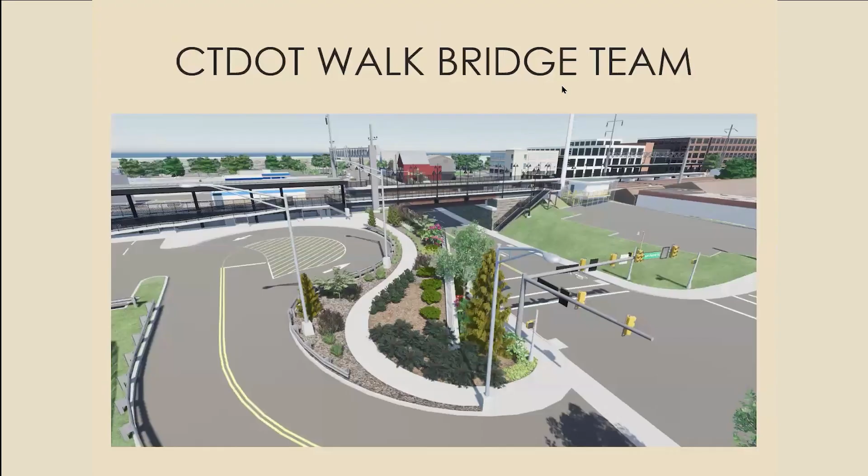What I'd like to do is go ahead and introduce our guests for the evening. Many of you have been writing into ENNA, the city, and our elected officials regarding what we call the Walk Bridge project. As you know, there are many components to that, 5 of which directly impact East Norwalk proper. Given the feedback and questions we're getting, we thought it was a good time to bring in the team. They're always agreeable to meeting with us, and they'd like to hold everything to an hour, which we'll try to do. They've been working all day, and we can always have a follow-up meeting. They're very gracious about coming back, and if we haven't answered all your questions by the end, we can submit those to them for a written reply or a return visit. Without further ado, and Stephanie, remind me if you can, because I'll forget: I want to come back to this slide if it's not part of your presentation, to orient folks on some portion of the work along East Avenue.

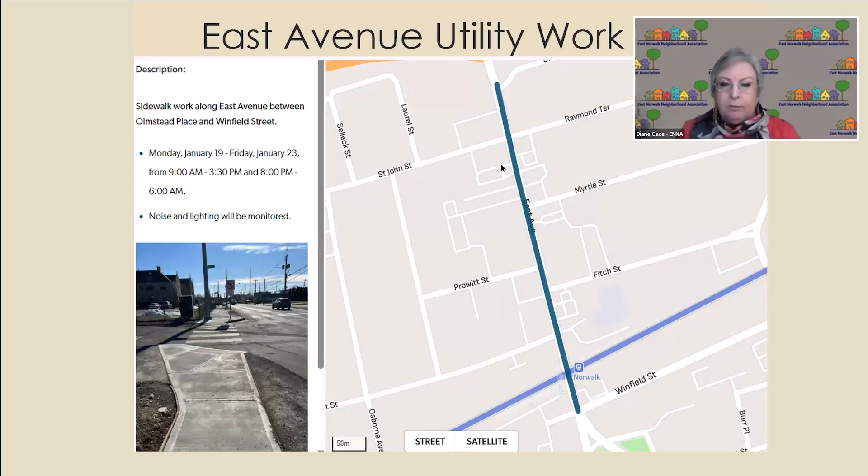Good evening, welcome everyone. Happy New Year. Happy New Year, thank you everybody.

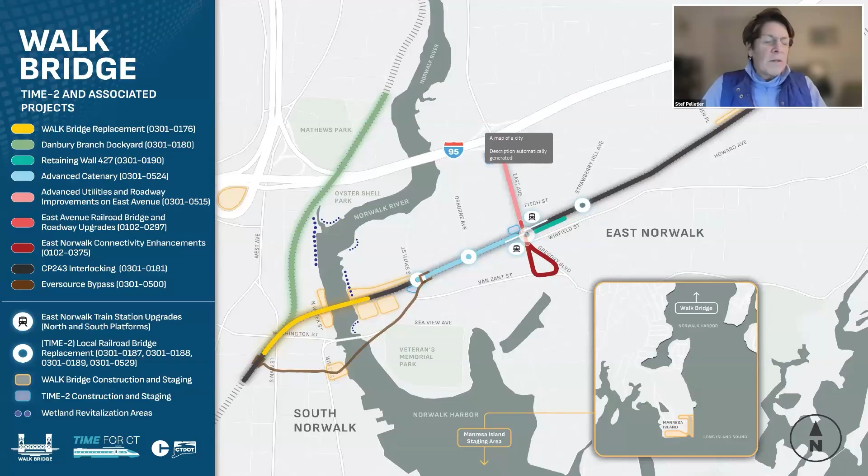We're delighted to be here. We have multiple concurrent projects going on in East Norwalk, as well as the Walk Bridge in South Norwalk. For tonight's meeting, we're here to provide an update on the projects in East Norwalk. We'll kick it off with RJ, who's going to take us through the map as a big overview of the projects going on in East Norwalk, and then we'll get into the presentation.

Hi everybody, as Stephanie said, my name is RJ Lesso. I am the project engineer for the projects associated with the Walk Bridge program in East Norwalk. Happy New Year, it's nice to see familiar faces and names on this meeting again. This is our project map. If you've been to any of our other project updates, you've seen this map. We have a lot of work going on in Norwalk, and in East Norwalk especially.

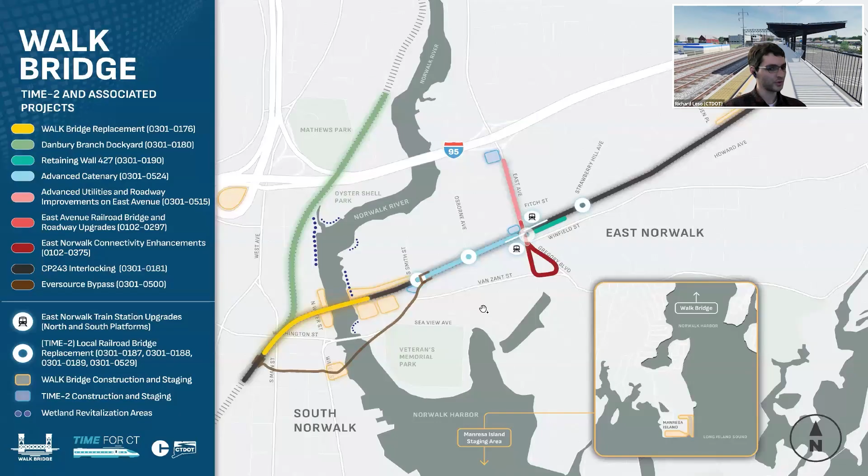Let's jump into the projects and take a look at the work in East Norwalk. We'll go one by one, starting at the west side: Fort Point Street, railroad bridge, and roadway realignment. Right now at Fort Point Street, we're working on the bridge abutments, the substructure of the bridge. As you may remember, the bridge is being built offline, adjacent to the existing bridge, so we don't anticipate any major impacts to trains, vehicles, or pedestrians. This portion of the project is currently anticipated to complete in summer 2029.

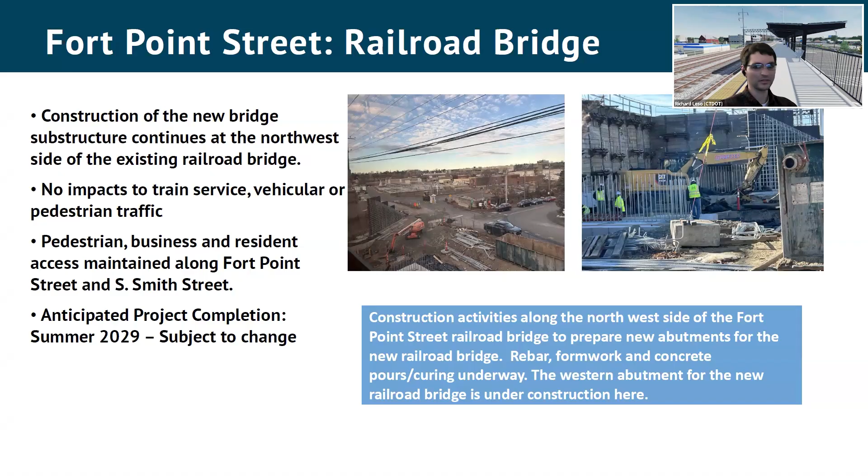If we could go to the next slide, we'll talk about a project that's had a bit more impact on traffic lately—retaining wall 310, adjacent to the existing Fort Point Street Bridge on the north side. You may have noticed we're forming and pouring some of the architectural facing on the existing retaining wall. Currently we're working on a permeation grouting operation in the street, where grout is pumped into the soil to stabilize it under the west end of that retaining wall. As a result of that work, there have been some impacts to traffic. Northbound passenger vehicles are currently detoured westbound onto Van Zant Street, and southbound vehicles are detoured westbound onto Reynolds Street to South Smith Street. The retaining wall work is expected to wrap up in spring to summer of 2026.

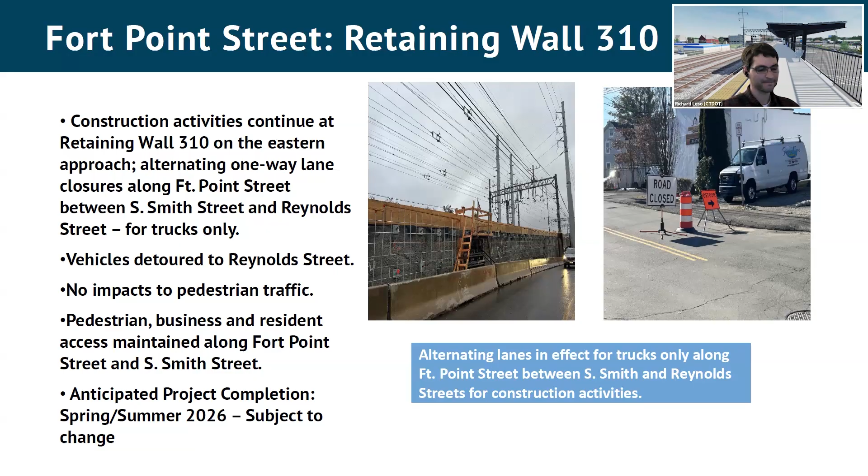All right, and pictures—we have some renderings. Again, if you've been on these update meetings before, you've seen this. You see the existing roadway realignment and our new roadway realignment. The new bridge will be directly across from the existing South Smith Street. This is going to resemble more of a typical intersection, and it's going to clear up a lot of the sightline issues that exist at that intersection now, and hopefully facilitate smoother traffic flow. You'll see we'll be adding bike lanes, new sidewalks, etc.

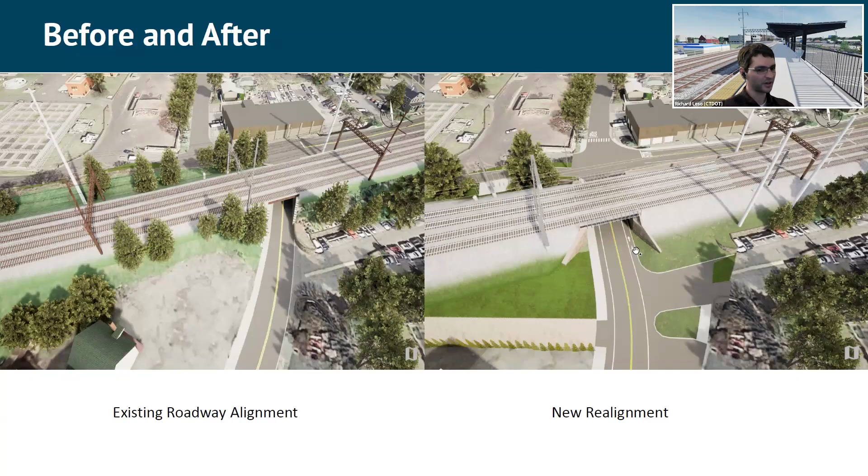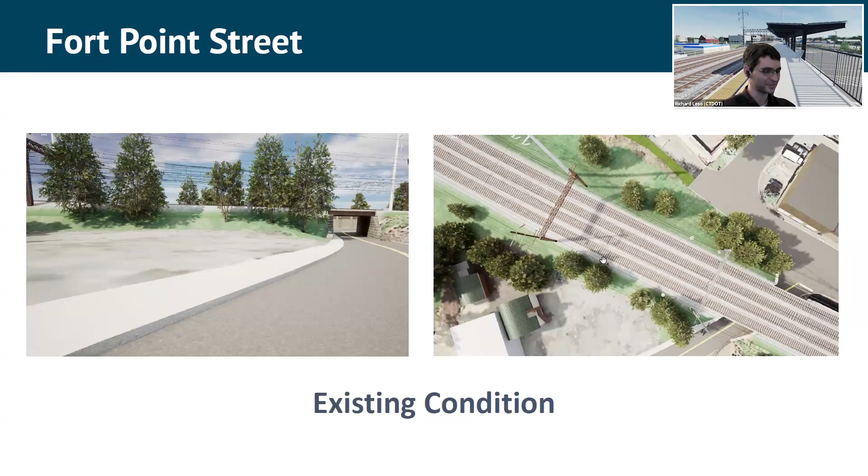I believe we have a couple more renderings of the existing condition. We don't have to stay here too long, I'm sure everyone's familiar with this existing condition. And then our final condition—again, you'll see we'll have wider sidewalks that are ADA compliant, bike lanes, and of course the realignment like I said before.

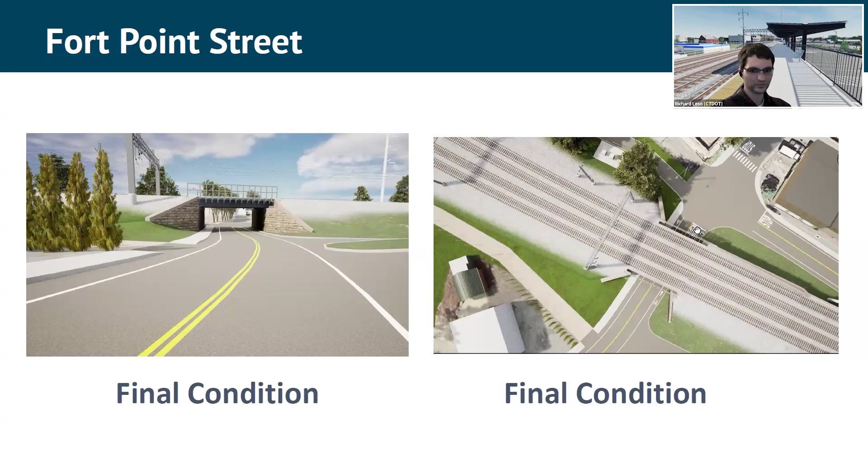The south side work is expected to begin in early 2027, basically following suit with what we did on the north side. We expect Osborne to be closed for approximately 6 months, similar to the north side closure, while we do that work. We expect the project to complete around summer 2027, and we'll wrap up by resurfacing the street and rebuilding the sidewalks.

Moving east, we have our East Avenue Railroad Bridge. If you drive through the area often, you'll notice there's a lot of work going on at East Ave. We're currently working to complete the north side of the bridge, and we expect the steel to be erected sometime in March of this year. Just like the Osborne Avenue Bridge, we'll do about the same thing on the south half once the north side is complete. We expect the south half to be wrapped up around winter 2027.

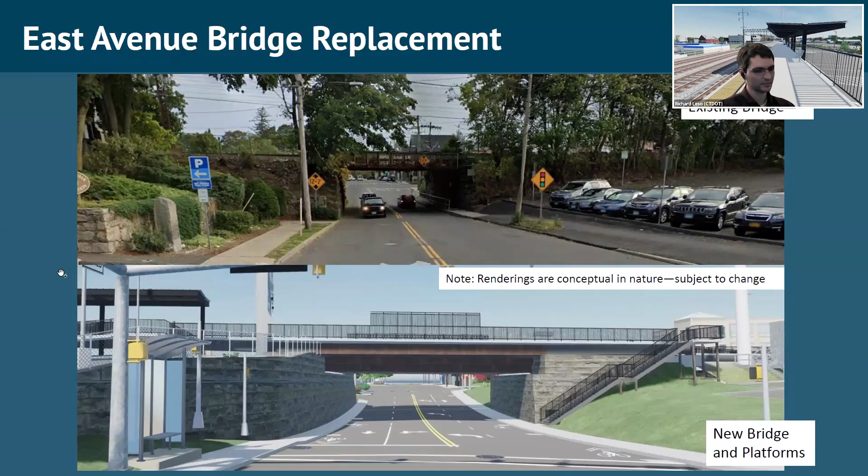We have some photos of the existing bridge and renderings of what the new condition will look like. You can see our bridge and our platform, which will also go over the roadway.

Hey Rich, the canopy steel just came in, huh?

It's Diane. Just before you leave those slides, it's hard to discern the depth perception from the previous slide. Is what the community is seeing here now including what we refer to as the lowering of the roadway, and where does that actually start? Because in the slide before, it seemed like it doesn't start at all, and then there's kind of a dip. Is what we're seeing on the roadway now the lowered roadway, or is that still waiting to be done after all the digging that's already been done?

Right now we're in an interim stage, so the roadway has been slightly lowered, but we haven't done our final lowering of the roadway yet. It will be in this area, that dip as you get into East Ave, as you go over this crosswalk, is kind of when the dip happens for our lowered roadway.

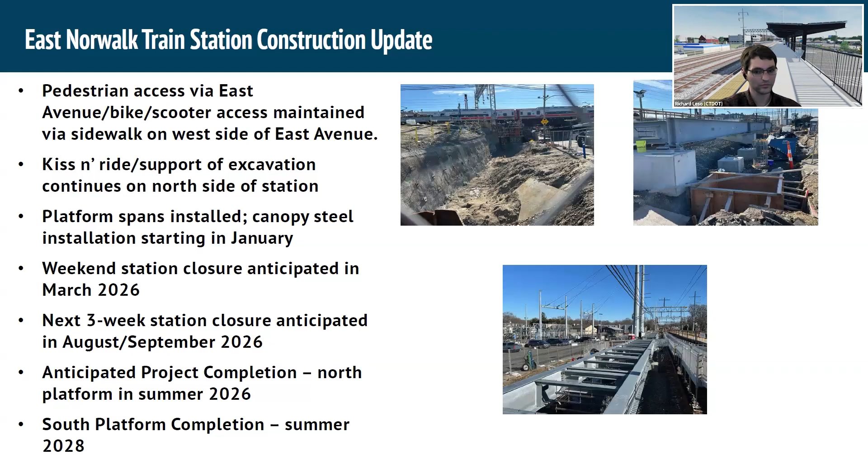Here's some of the renderings of the existing station, and this is what we're working toward. This is the kiss and ride area that I was talking about earlier. This alone will prevent you from having to go into reverse when dropping off a passenger. Forget everything else we're doing, this alone is a major safety improvement at the station. There's a lot of foot traffic at that station, and preventing vehicles from having to go into reverse to drop off a passenger is a major safety improvement, especially during peak commute times.

Can I ask a quick question? Sure, sure. The kiss and ride, that's on the New Haven bound side, yeah? New York bound. Oh, it is on the New York bound side. Oh, that's terrific. Great, thanks.

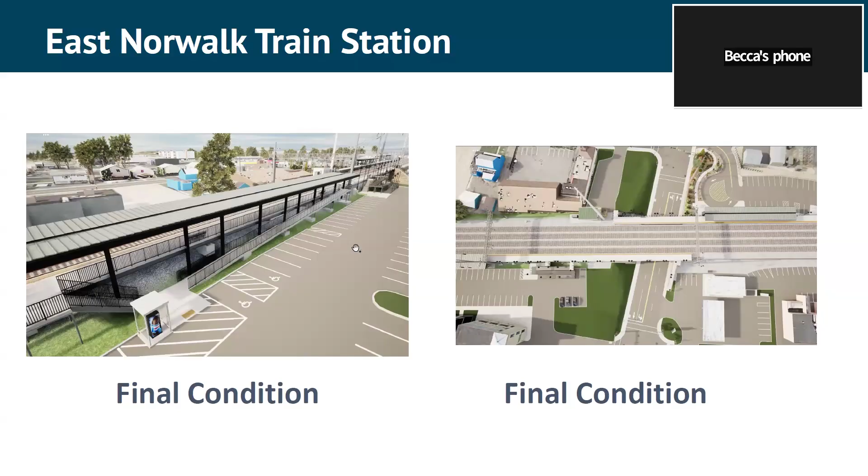And this is just another view of the final condition at the train station.

Moving on, East Avenue roadway improvements. East Avenue roadway improvements is sort of a catch-all for all the work we're doing on East Avenue and some of the adjacent streets there. That work is happening under a variety of DOT-administered projects. As you probably already know, the roadway will be widened, and you'll see new crosswalks and sidewalks. And then, of course, the Gregory Boulevard streetscape and drainage project, which we move into right after this slide. All this work is expected to last 3.5 years, completing sometime in the fall of 2028.

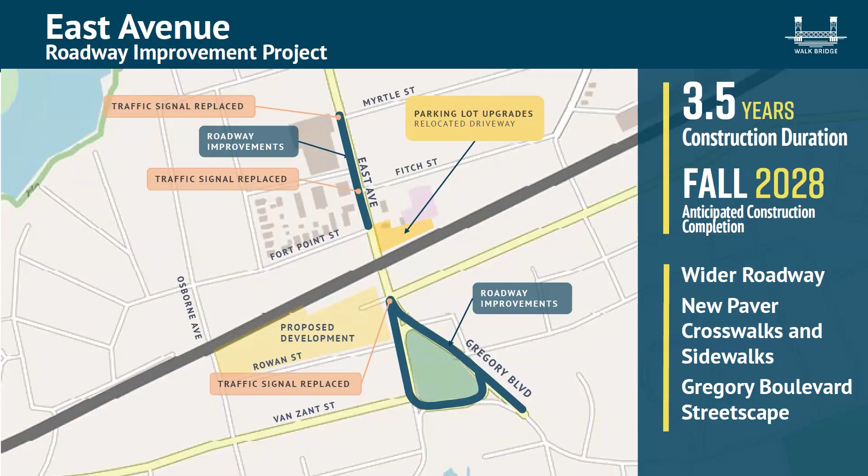Now moving into East Norwalk connectivity enhancements. This is a streetscape project, officially known as the East Norwalk Connectivity Enhancements Project. Like a lot of the work on East Avenue, the project is designed by the city, and the contract is administered and paid for by the Department of Transportation under District 3 construction, which is the unit that I work for in DOT. And of course, we're administering all the Walk Bridge program projects.

This project is going to be starting up soon. That contract was awarded to the Grasso companies approximately a month ago. So the next step is that contractor is going to be issued a notice to proceed in early February, which is how we officially commence the construction contract and authorize it to begin work. Under this project, we'll be doing a lot of deep drainage work down Gregory Boulevard, full depth roadway reconstruction, sidewalk reconstruction, and we'll also be adding a dedicated bike lane on Route 136.

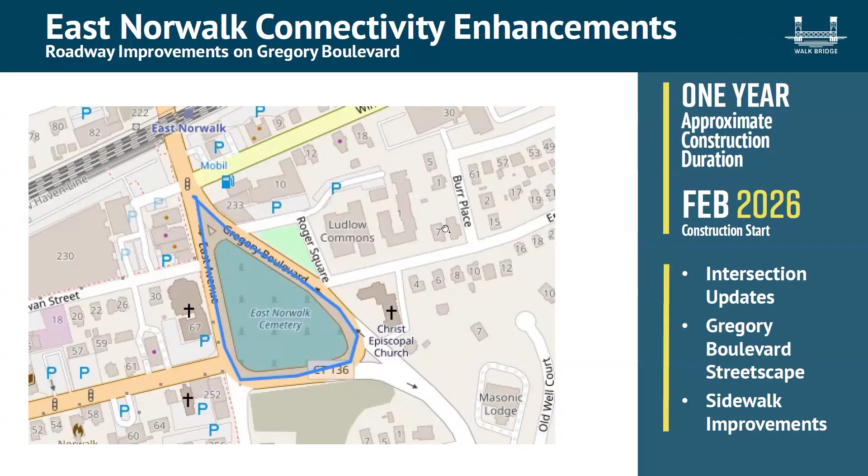And then we have some information about the drainage project on Gregory Boulevard, particularly the intersection of Gregory Boulevard and Cemetery Street. First, I want to say that I know this is a sore spot for the community. Just to provide some background for those who may not know, and I'm certainly not an expert in this matter, but I am willing to communicate the facts as I know them. So the city and DOT worked to finalize the plans for this project, and under those plans, the island at Gregory Boulevard and Cemetery Street required reconstruction. Under that island is an existing box culvert where the East Avenue drainage flows underground, down Gregory Boulevard, and eventually into the culvert under the island into an existing opening in a box culvert.

DOT received a request from the city to review a revised design which proposed retaining the existing oak tree in that island. Unfortunately, due to a variety of technical factors, most notably the age and unknown condition of the existing box culvert, for which there are conflicting and in some cases non-existent records, there were a lot of unknowns about that culvert. DOT ultimately decided that the risks to the projects—plural, meaning this project and also other projects which would be consequently affected—

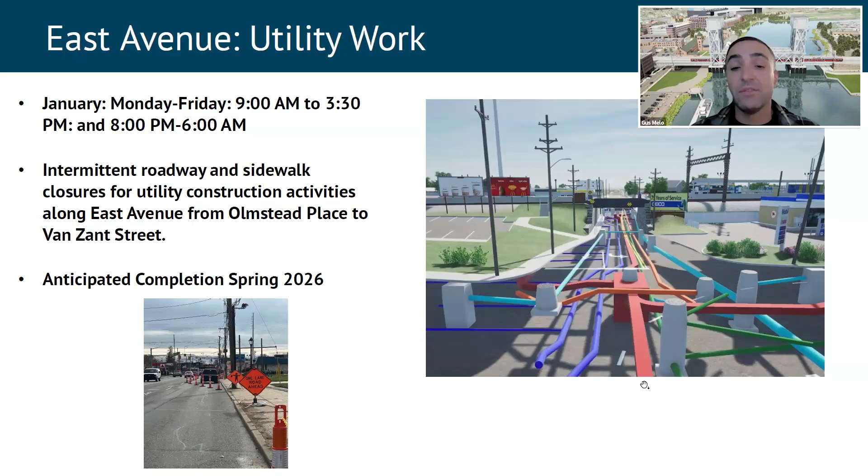Also, we need to have that new drainage line in place, so that when we lower the road we could take in the additional flows and prevent the flooding you guys currently frequently see along East Ave. We need that drainage installed before we do that final lowering - we don't want to create another swimming pool for you guys when we get heavy storms. So that's really why these things are sequenced in a certain way, and it has to be done in that fashion.

Okay, I don't think I'm still clear on the steps taken relative to lowering and digging up the road again and accomplishing all of that, especially with the drainage, but we can move on from that, and maybe some other folks have questions on it.

I think the other big question is the timing on all of this - is this a priority in terms of trying to expedite this versus what the original project plans were? Because it does seem to be dragging on forever, and we see timelines now of 2027 and 2028. What can be done to expedite this?

Well, we try our best, right? We've added additional crews, we're looking to add additional shifts out there, and try to maintain the schedule as best as we can.

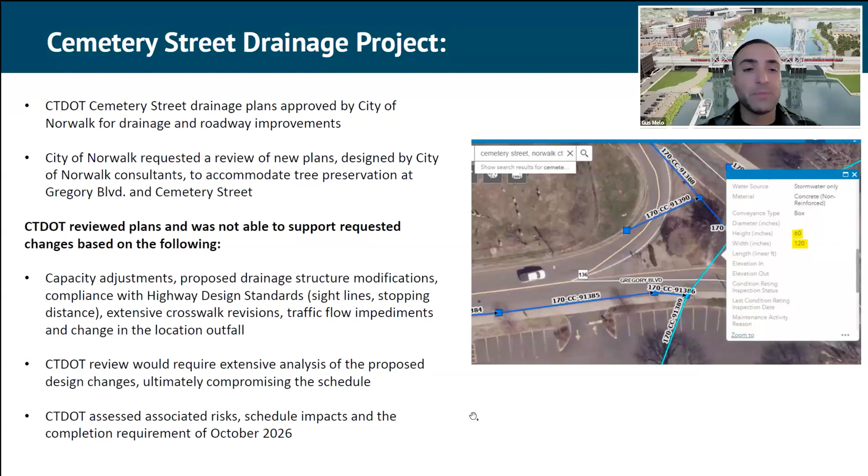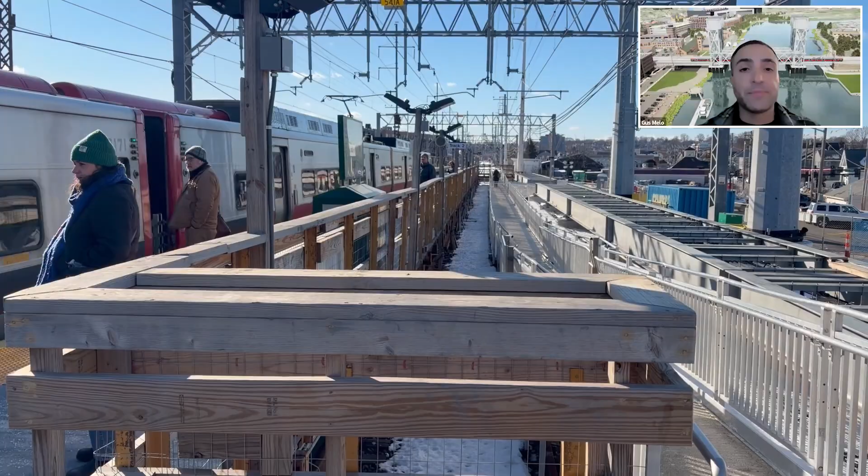Since we're looking at close to another year before the actual train station is completed, is there any plans to put up a temporary shelter for people in the rain or snow? It's been pretty brutal out there. No, there currently are no plans to put in that temporary shelter in that area. Unfortunately we're not able to do that because the temporary platform was constructed over the existing track one there, and there's overhead catenary wire that are electrified, which would prevent construction of that shelter.

Next would be, is there an improved traffic pattern for the existing New Haven side parking lot? No, we're not making modifications to that parking lot.

Judy in the chat says, when there are major closures that affect the flow of traffic to 95, can there be coordination with Westport so that Winfield and Saugatuck is not closed at 17 from East Norwalk at the same time? Yes, we'll take a look into that.

Is Strawberry Hill Bridge built to handle the periodic and frequent truck strikes? At least every 2 months a truck nails that bridge. So I can comment on the Strawberry Hill. Yes, the Strawberry Hill Bridge is designed to be impacted by an overhead vehicle. We would prefer they didn't drive into it, but, yeah, of course.

Do you have any graphics for the Eversource project? No. No. Okay, I'm not even aware of what project they're doing.

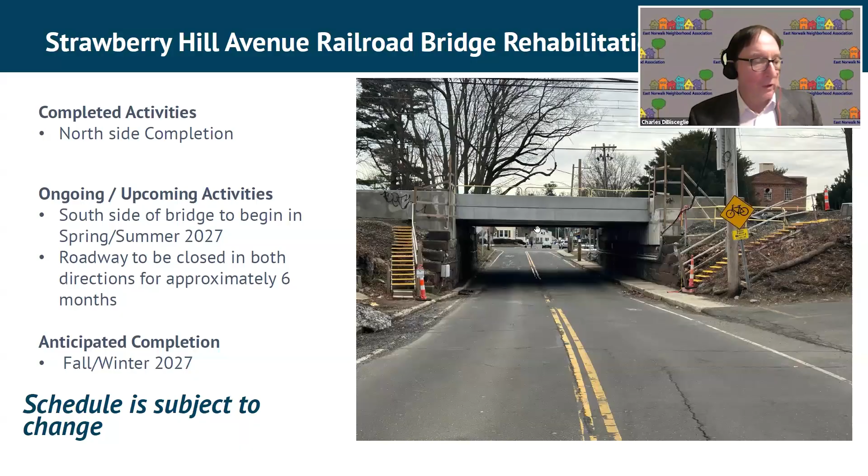I have a question about the Osborne Bridge. When you say you are going to restore the sidewalk, is that both sides? Because one side, the sidewalk just kind of ends at that bridge, and pedestrians have to walk into the street to actually get to Fort Point.

It'll be the existing sidewalks that are restored. We'll put 5-foot sidewalks back in the existing footprint. So that will remain a dead end basically for the sidewalk on that one side. I believe so, yes.

If that's the case, is it possible to petition to add a crosswalk and maybe a warning light, like a light that pedestrians can illuminate to alert cars because the pedestrians have to cross there? Even just some watch for ped signage would be really great. Yeah, we could look into that.

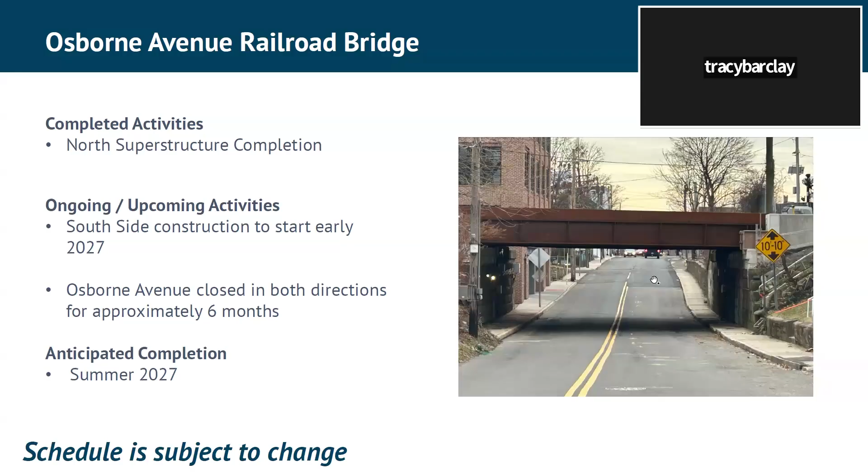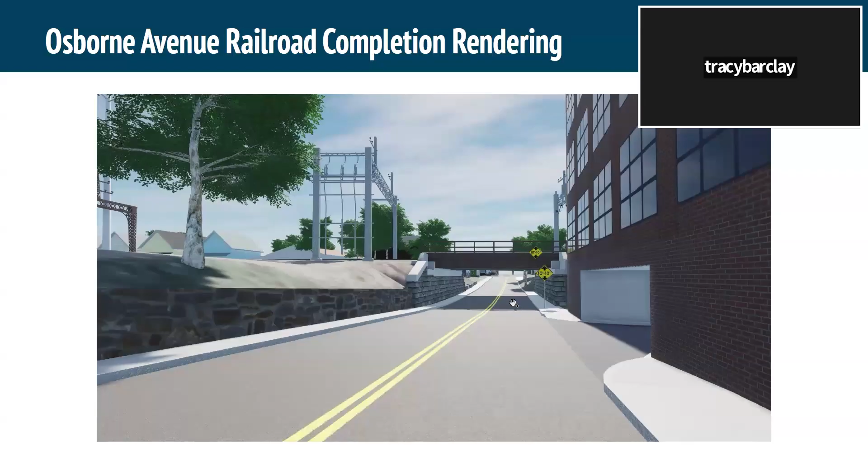On the rendering, it looks like there are no sidewalks, only a bike path. Oh, I'm wrong. Yeah, I agree, there should be a crosswalk or something, there are so many pedestrians there. Yeah, it's the heart of the TOD.

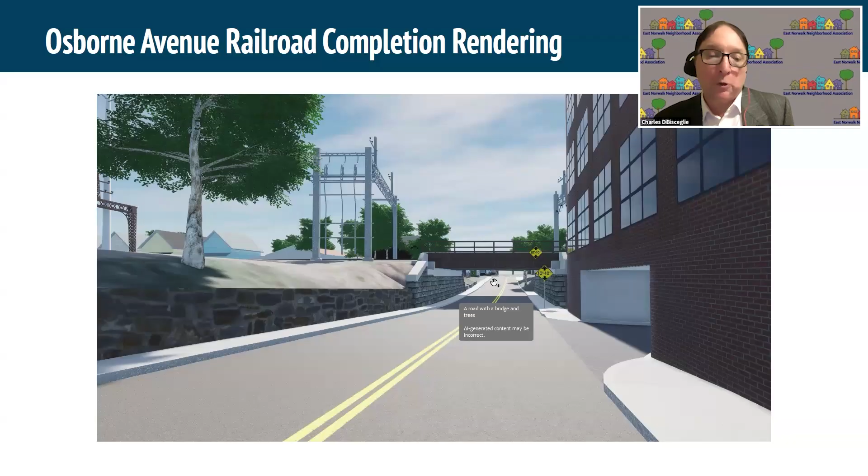Okay, so when will the double pole at East Avenue and Winfield go away? It forces pedestrians into the street if they're coming from Gregory. Double pole, what are you referring to?

If you're walking past Giant Laundry towards the East Norwalk train station, there's a double pole that blocks the sidewalk. It's the one corner not visible in that last slide you just showed, or in any of your renderings, but I'm talking about the corner nearest to Giant Laundry, where there's a double pole at the Chester's Chicken gas station. If a pedestrian is coming from the Giant Laundry direction, you have to walk into the street to get around the double pole if you're not thin as a rail and don't have a suitcase or a stroller or anything like that with you.

And even though the crosswalk is a lot better with the reminders, people still turn on red at whatever speed they like. That's the Valero corner. Yes, thank you. I just think of it as the Chester's Chicken corner. The south side of Winfield. Yes, southeast corner of the intersection.

Yeah, that's when we're gonna be upgrading that intersection there. Jeff, do you remember the date of this? It's '28 when we're gonna be putting in those signals? Do you know that off the top of your head? Off the top of my head, that sounds correct. We can get back with a better date, but that seems like in the ballpark. I would have to get back to you on the schedule, but it'd be late '27, early '28 when we'd be putting in the new signals, which would eliminate all that. But it is planned as one of the utility improvements that the double pole will go away. Yes, it is. Yay! Thank you.

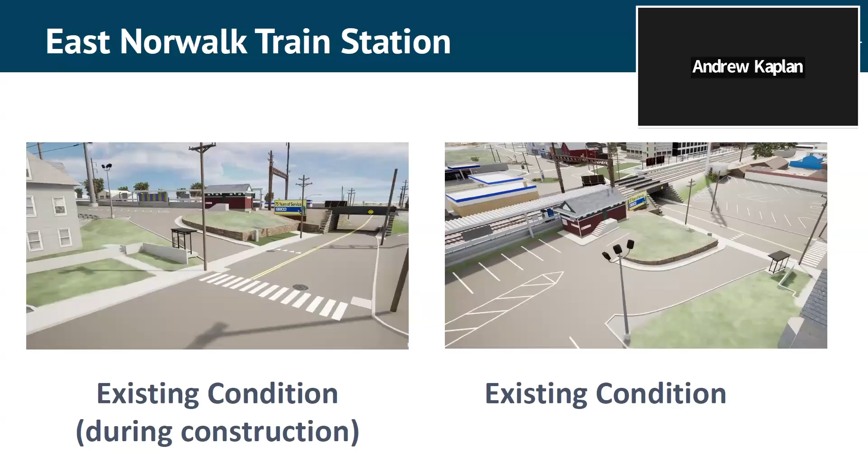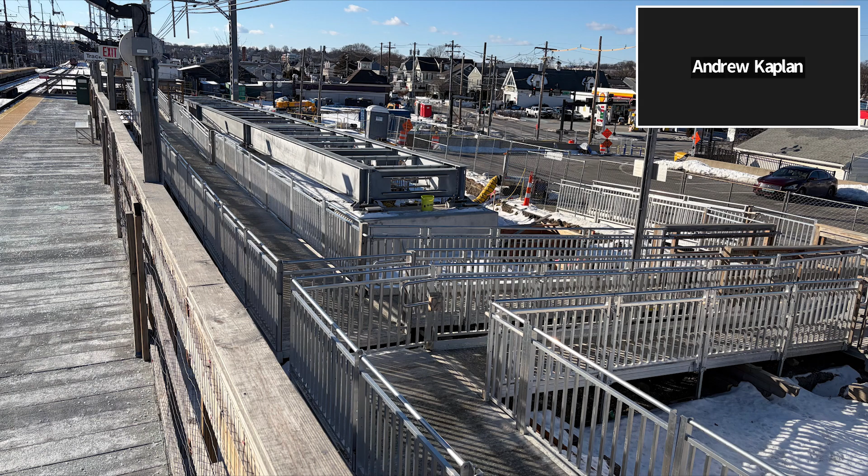I just want to revisit the shelter that can't be erected on the New York City side platform. Can you explain that a little further? I don't see why you wouldn't be able to cantilever something out over there, or possibly get 4 points and post down something. I'm out there every morning, rain or shine. So why can't you put something up?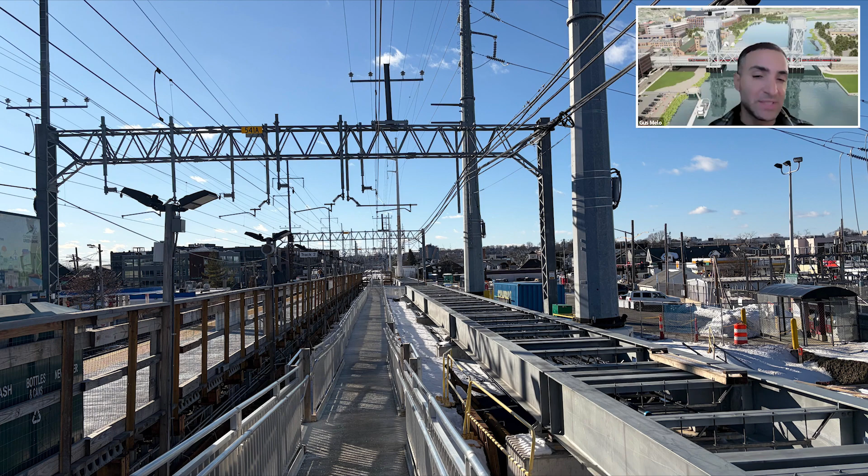Right now we're currently over that temporary platform on track 1, which has overhead catenary wires. We can't put a structure too close to it. So that's really the issue we have out there — there's no section along that whole run where the catenary wires aren't directly overhead, and you can't get too close to them, or it becomes an issue. That's why we can't have anything in that area.

So you can't get below them? We could get below them, but you can't get too close to them with anything.

It's ironic that this whole project started originally as Metro North with the catenary lines, and then turned into something else, which you're seeing today, and then some. But I'm not understanding — the catenary line work that still has to be done on the East Avenue train station, is that going to remedy the issue for the canopy?

No, we're putting canopy on the new platform, which is adjacent to the tracks, adjacent to the existing catenary. The platform is literally sitting on top of track 1, the interior track, but you have overhead catenaries above it.

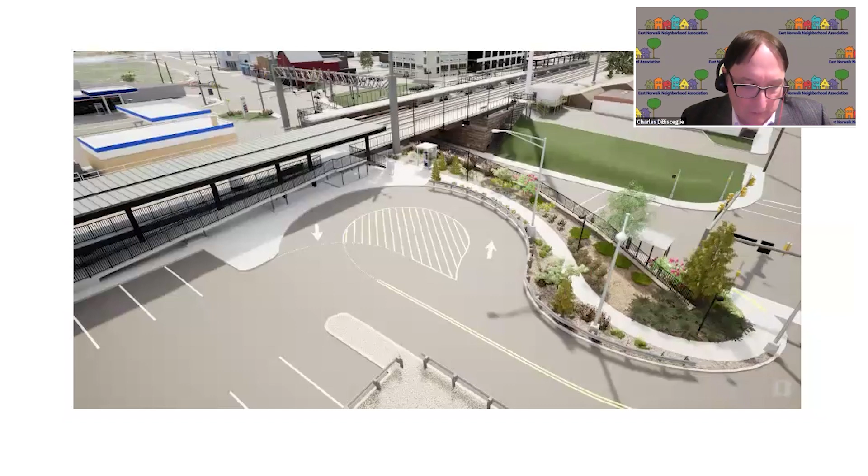I actually have one quick question about the final rendition of the station. I know that the ADA compliant ramps are there and they're necessary, but are there any plans for a fast track staircase to get to the platform without walking half a mile up those things? If you're late for a train, it really becomes a problem. In the final condition, there will be. Okay, very good, thank you.

Did we get an answer to the first question about the lighting under the bridge? I think that may have been answered, but then I didn't catch it. Under the railroad bridge, yeah, there will be lighting under the bridge. I'm not sure it's shown in the renderings, but there will definitely be lighting under the proposed bridge on East Ave, after the lowering of the road.

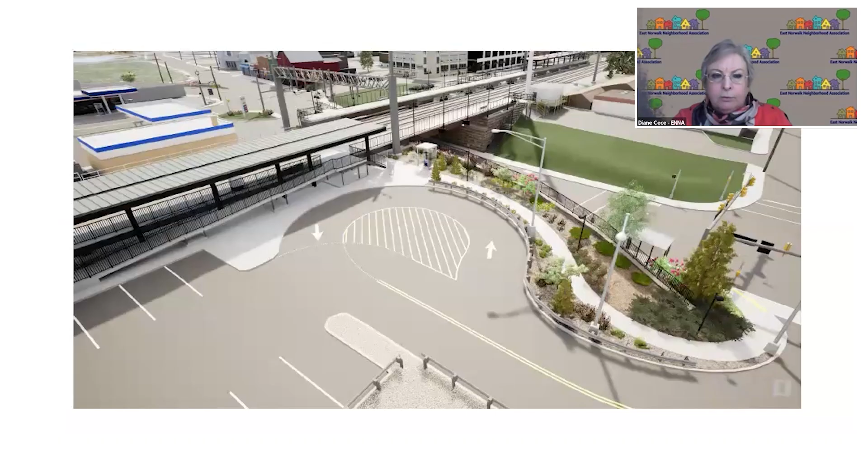The other question I have is I was in communication with your team, just from ENNA, regarding the southern portion, the New Haven bound side, where you were talking about needing to put in another trench and a structure there. I didn't really understand what that is, so maybe you can explain that to us. And also, can you confirm for sure that the freestanding building that Spinnaker committed to the community when Brim and Crown went in, that was supposed to be an amenities building that maybe had a small newspaper stand or coffee shop on the bottom for folks to stand in while waiting for the train — can you talk about the structure on the south side and confirm whether or not there's going to be an amenities building there?

The drainage structure on the south side you're speaking to? As part of the project, we're putting in a new drainage line, which is tying into the culvert down by Cemetery Street, so those drainage improvements are part of the improvements for East Ave to prevent any future flooding there at the road. I'm having a little trouble understanding you. I'm sorry—so what I'm talking about is within the parking lot, I believe, on the south side, on the New Haven side.

Yeah, there's a utility building going in along the railroad, Diane. It's a utility building, not for commuters, and we're doing utility work there. That's why we had a temporary parking restriction of approximately 20 spaces, to dig the trench and put in the utility building. So that's purely for utilities.

It's not for commuters. As far as the Spinnaker promised building, I don't have any information on that. I don't know if members of the team do or not. We do not have any information on that.

And the utility building is just like a structure that you have access to maintain. It's a building where we can maintain utilities for the station - power panels, generators, those appurtenances.

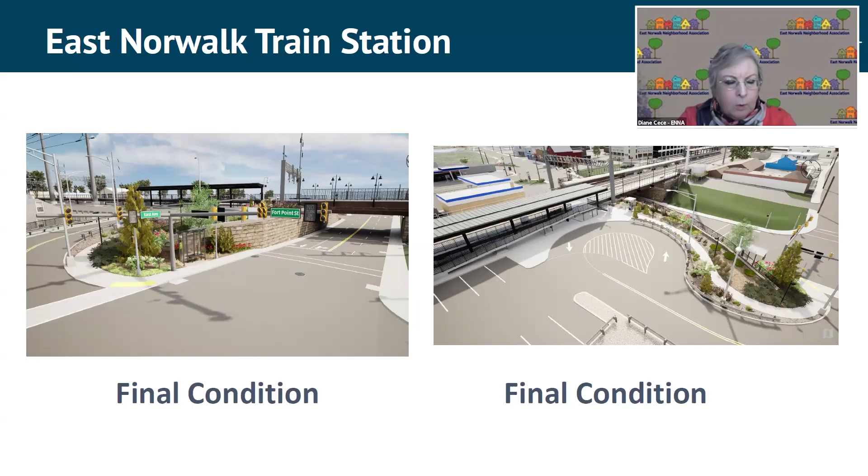And then while we're waiting for a couple of other questions, do you have any definitive answer yet on the future of 182 East Avenue, the temporary commuter and staging lot next to Rite Aid, or the former Rite Aid? No, we do not.

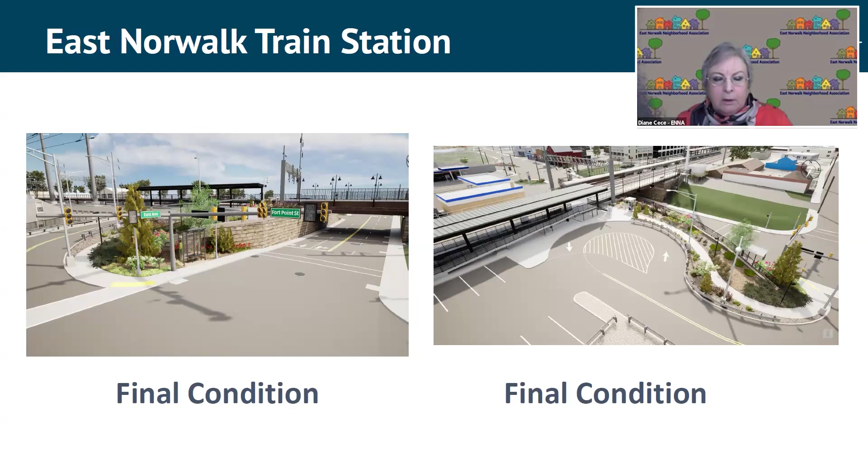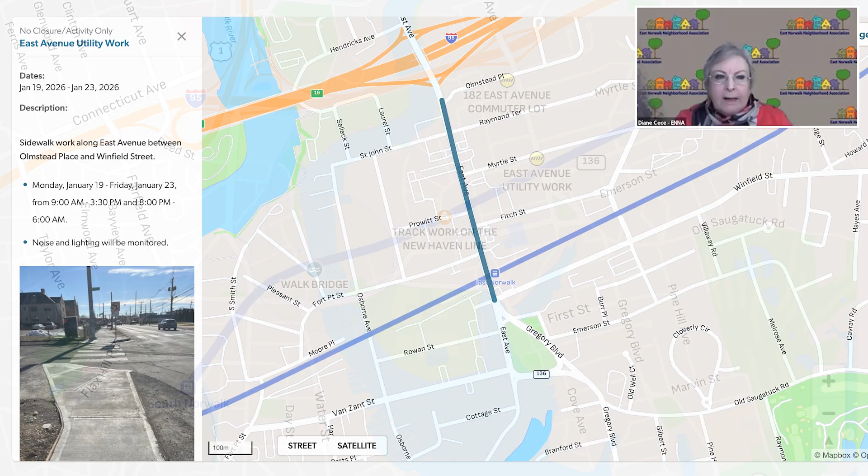Okay, and then Stephanie, the picture that I mentioned before, the one I wanted to show you - you'd have it there somewhere. The original utilities, undergrounding and drainage work, all of the original renditions we saw only went from Olmstead Place down to Fort Point. And then there was some extended work that would have come up to portions of it, up to Van Zant. When exactly did DOT or the Walkbridge team get involved with anything having to do with going around Cemetery Street into Gregory Boulevard? Since that's not in any of the original documents.

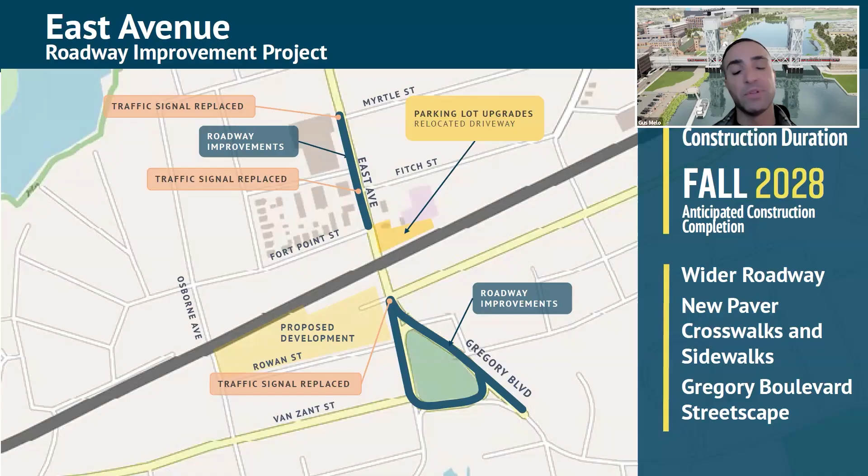That was always part of the plan. It was part of the East Ave Roadway project, which has been designed since the early 90s, so that was always going to be completed. What you're seeing there is regarding the advanced utilities. The other portion around Gregory Boulevard is part of the East Ave Roadway project, which we had to break up into two pieces because of the way utility work has to be staged. So that's part of the confusion when we're all looking at this. There's the original East Avenue work, and then that project was combined with the Walkbridge project, as most people know.

But everything that was then shown to us under the Walkbridge project did not have any of the maps that extended out to Gregory. So I'm just saying, from our point of view, since the Walkbridge project was combined with the East Avenue Improvement or Roadway project, why was that excluded even in the most recent renditions?

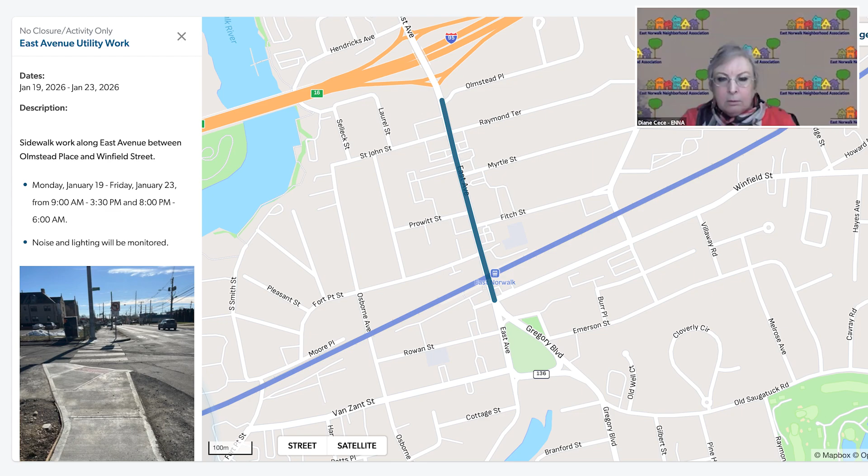You talking about this one right here? Because this is just showing the utility work. And what I'm saying is the original renditions of this did not have the red - it only had the original line coming down. I can share my screen if you want, but it's still the rendition you show on the Walkbridge site.

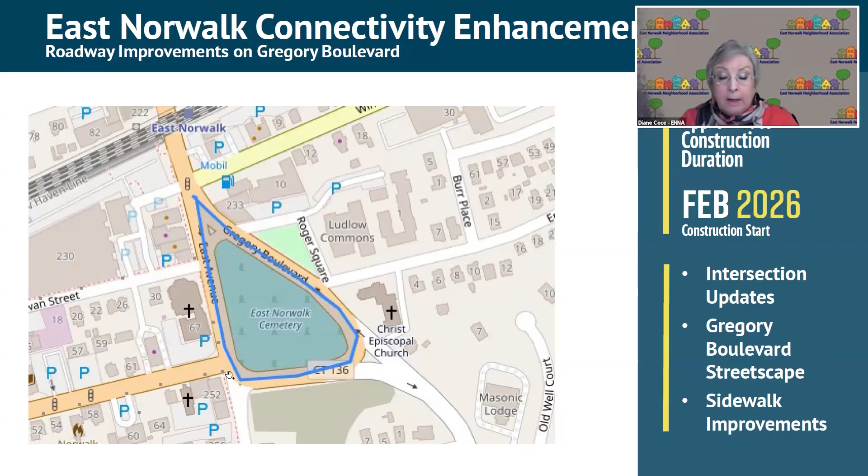Part of the reason we wanted you here is that we're getting resistance from the city trying to address all the questions the community has. And the last communication we had with them, in particular regarding Gregory and Cemetery, was 'you have to go to the Walkbridge folks and ask them.' Basically, the city saying we have nothing to do with this. So...

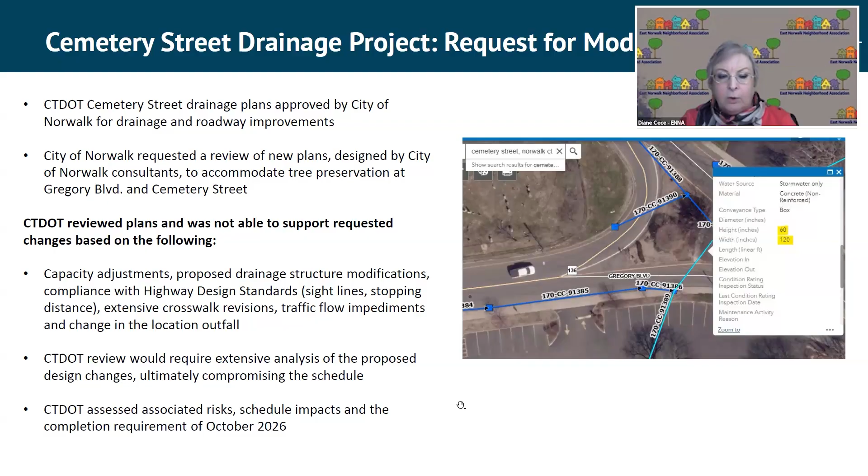I mean, we're not hiding anything. That's always been part of the project, that we were always going to do that work. It's been part of the program for the last 4 years. So even though it's not on the... okay, I'm not going to belabor it, but even though we wouldn't have seen it on those maps, in your own project design, you're saying it was always a part of what you guys were working on.

Yeah, and even the different updates we've done, we've always shown that remedy. So I'm not sure what graphic you're referring to. Since I can share my screen if...

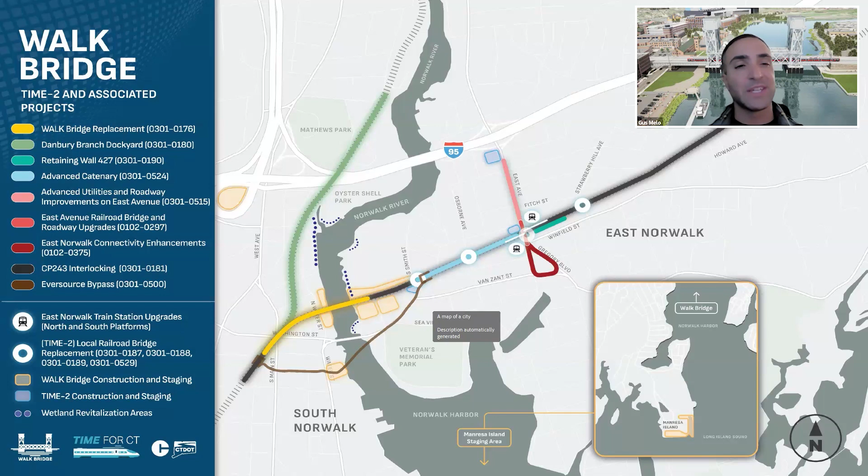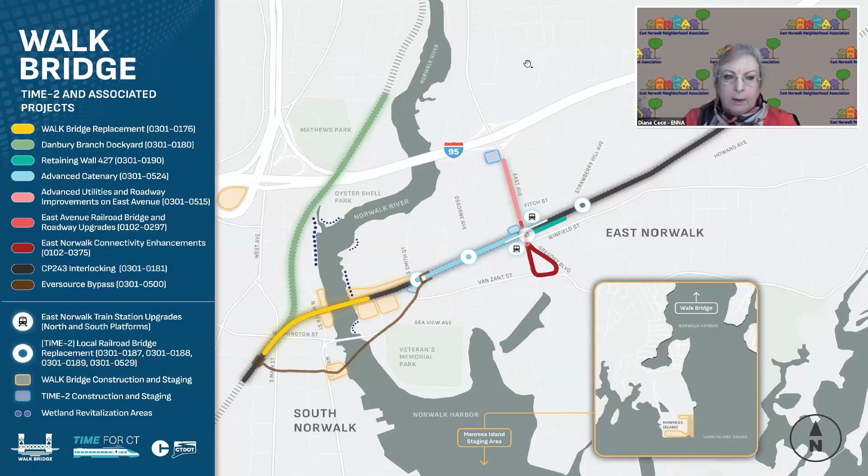Yeah, go ahead. Because I think the other thing I'd like to understand personally, and you can follow up with this if you want, is what things would be different now in the absence of the One Cemetery Street development and the way they had to configure their layout in order to have that particular driveway. Let me get to the picture I'm talking about in a second - the misunderstanding there. That's specifically to the utility work, which is between Winfield and Olmsted. That's not the road reconstruction.

Okay, so there's undergrounding. It's just that graphic there where you saw all those different networks of conduits and duct banks underneath the roadway. That's the limits of that work.

And okay, so is that East Ave utility work, not East Ave road reconstruction? Okay, so the other portion you're calling the road reconstruction, which then includes the drainage versus the utility that we saw. Correct. Okay, and then let me ask you one more question, Gus, and I don't want to put you

On the spot, but if you can't answer it, just tell me. So in all of the original renditions, and now I go back 20 years with this project on East Avenue, just so you know, the improvements that were supposed to happen under the bridge, prior to all of the improvements that you guys came up with, that was all supposed to be handled at Fort Point with the Water Pollution Control Authority and the city working together with pumping stations there. Do you know when it was extended to be beyond that point and then come out to the culvert and the drainage that's at Gregory?

I know you're saying in the 1990s, and we all know that it was identified then, but for all those years, the city did nothing. And three of our directors of public works said there was no intention to do that, the solution was at Fort Point Street.

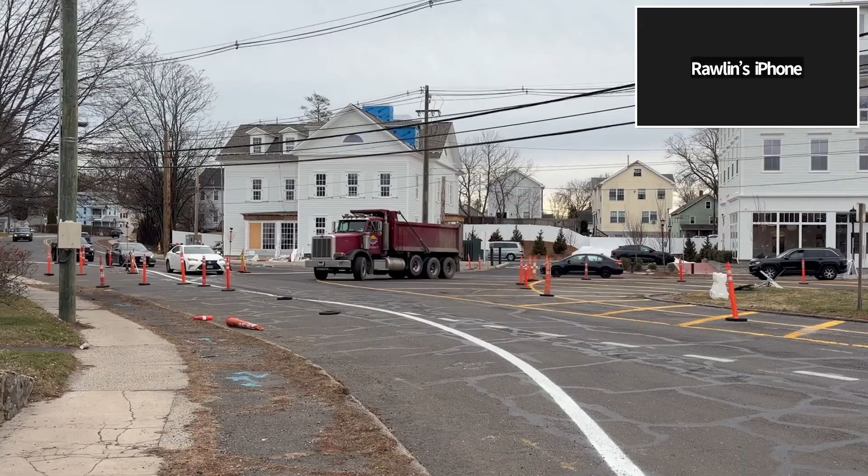I just wanted to briefly address the traffic pattern issue right there at Gregory and Cemetery. I know someone mentioned it in the chat, but we are addressing some concerns we did get in regards to that traffic pattern with the yield sign over on Gregory approaching Cemetery / East Avenue. I was actually out there today just monitoring the situation, trying to get a sense of what's going on. Obviously there's some confusion because East Norwalk residents aren't used to having a yield sign coming off of Gregory Boulevard, and the people turning onto Cemetery or from Cemetery onto East Avenue from the curve have no sign there now.

There's just a lot of confusion on everyone's part, so I am monitoring the situation. I'm trying to get out there sometime in the morning—I was out there for the AM rush hour. Tomorrow I'll be there in the evening rush hour just to see how everything works. But I just wanted to put that out there.

Thank you so much. And I should have mentioned, for folks who may not know you or met you at our last meeting, that Officer Amparos is actually our East Norwalk community policing officer assigned to our district. He'll attend our meetings when time permits, on his own time, as he's done in the past. We do appreciate the chief allocating the time for you to monitor over there.

We know people are, and I'm very concerned about that pattern and people understanding how it'll work. I think it's possibly a tragedy waiting to happen with people flying through there. I do know there are at least a couple of people already sending requests to the city and state asking them to reconsider that change before it gets too late, to go back and really let the one cemetery development deal with whatever they need to do with their driveway, versus changing the entire traffic pattern in the community and on a state route.